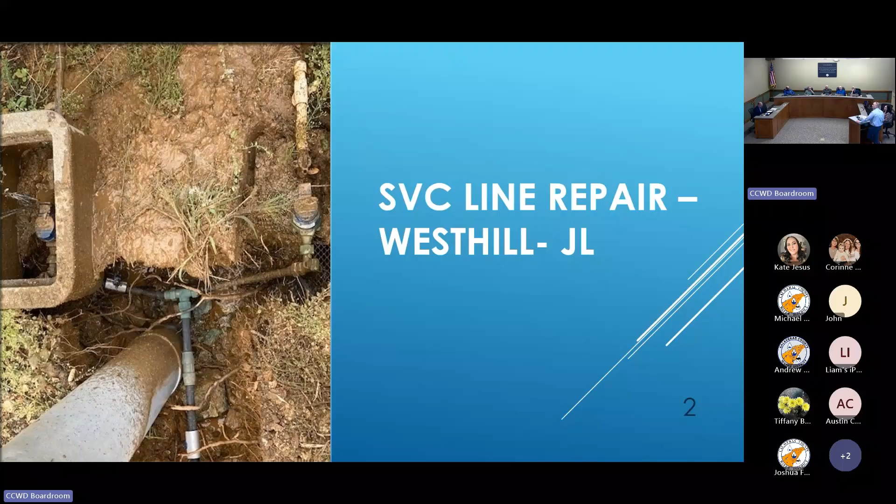So this one is called 1 for 3. You expose the service line and the manifold that feeds 2 meters, and you find 3 leaks. So there's what the manifold looks like, one service line going to 2 meters. You have a leak shown in the image on the left, you can kind of see that spray. In the image on the right at the manifold, you can see it spraying in 2 different directions. Our crews just replaced this whole thing.

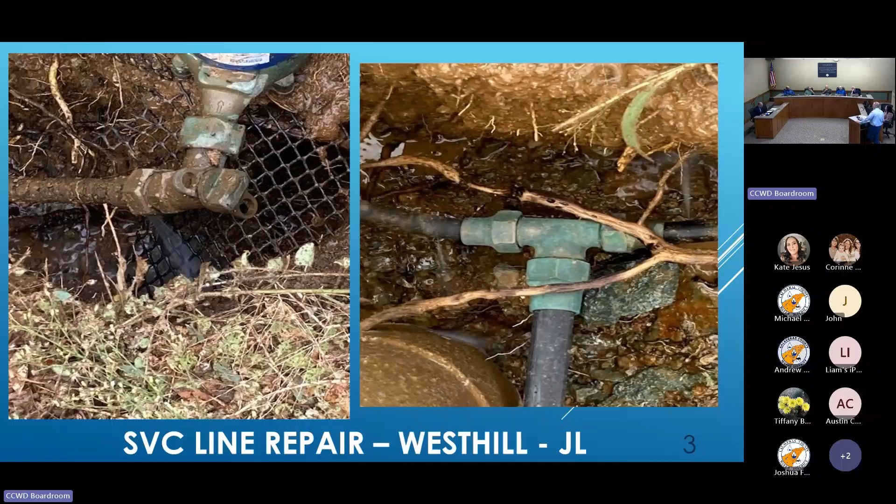One thing that's interesting about this image is the image on the left - you notice the person wearing slides is not a CCWD employee. Oftentimes when our folks are out working, they have to contend with neighbors who are critiquing their work as they go. Just highlighting that there.

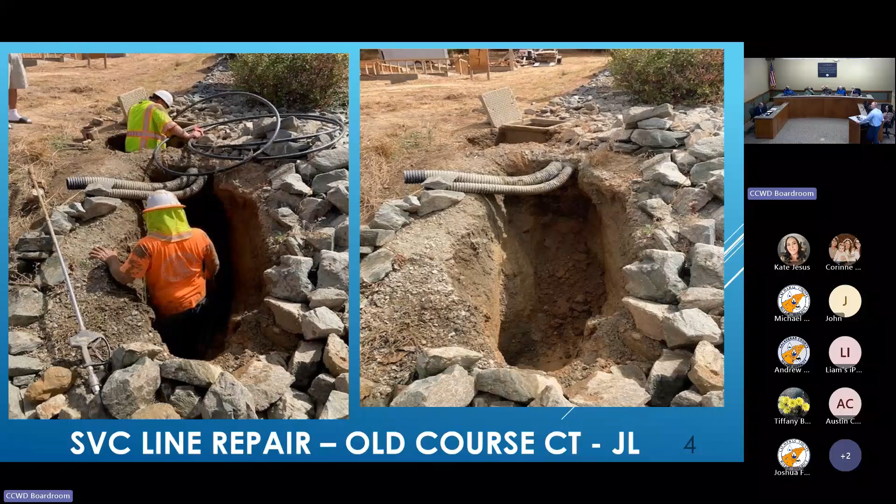This is an example of an emergency we had - a hydrant runner break in the image on the left off of Little John Road, water everywhere, crews out in the middle of the night. They were able to install the valve and a short section of new pipe to make a repair.

Then they come back the next day and pour a sanitary pad, put the G5 in, and make it look very clean. Moving forward, if somebody accidentally runs over that fire hydrant, we can shut the water off at that valve and come back at a later point in time to make a repair.

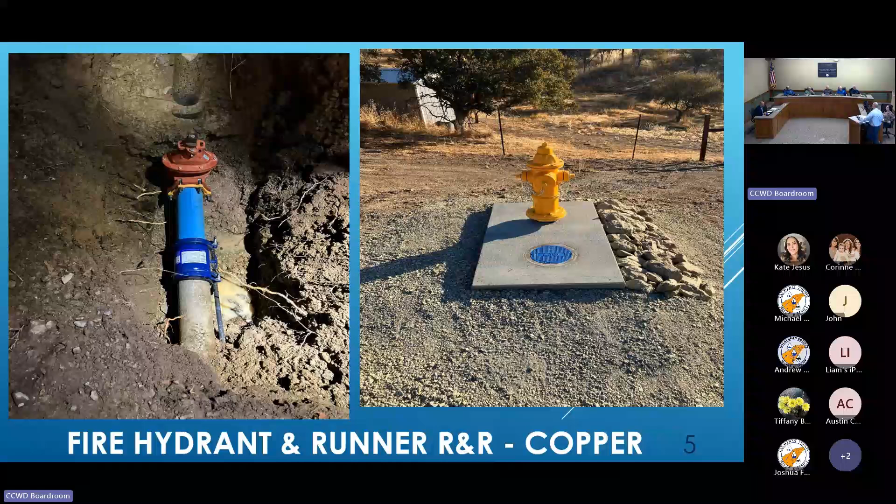So I want to highlight this one - this is cooperation between the Poker Flat Homeowners Association and CCWD. A service line that fed the Homeowners Association's park went through a neighboring property, and CCWD was able to work with the HOA to relocate the service line to make it a much shorter distance and direct feed to the park. Just want to highlight all the PG&E and telecom in that USA on the left.

All of that PG&E power sits in a common trench with the water - the same trench as the water. And our service lines are usually below PG&E's equipment, so we were there first.

But there's a lot of conversations we've had out in the field about what could go wrong. I'd always worked on the assumption you weren't supposed to put them in the same ditch, but you guys know your business. No, I mean, we're dealing with infrastructure that was installed many years ago. The district has had a lot of conversations with PG&E about improvement projects for Copper Cove and Poker Flat in an effort to eliminate this issue. This isn't the only location where we have this issue - we have it up in Big Trees Village also.

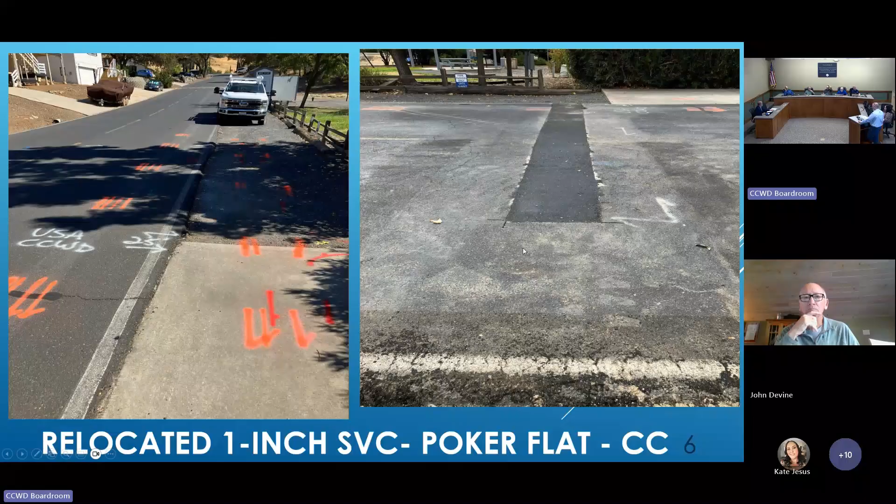And it causes, at Poker Flat, we've dedicated a lot of time and effort to replacing service lines out there, and it slows that work down. Our crews have to be really careful as they go through there. Service line repair in Venado up in the pass.

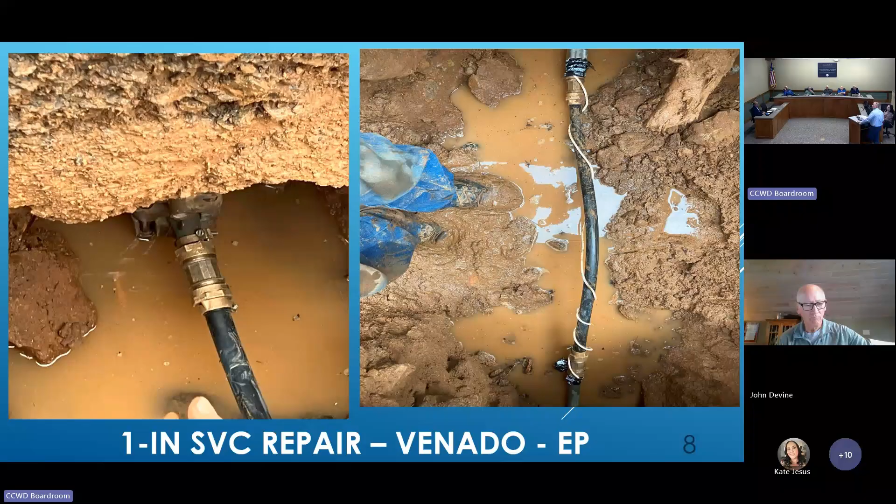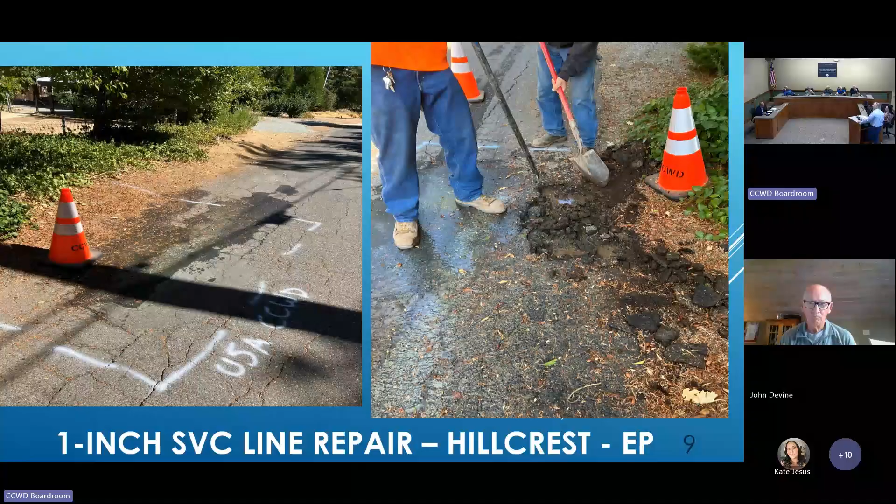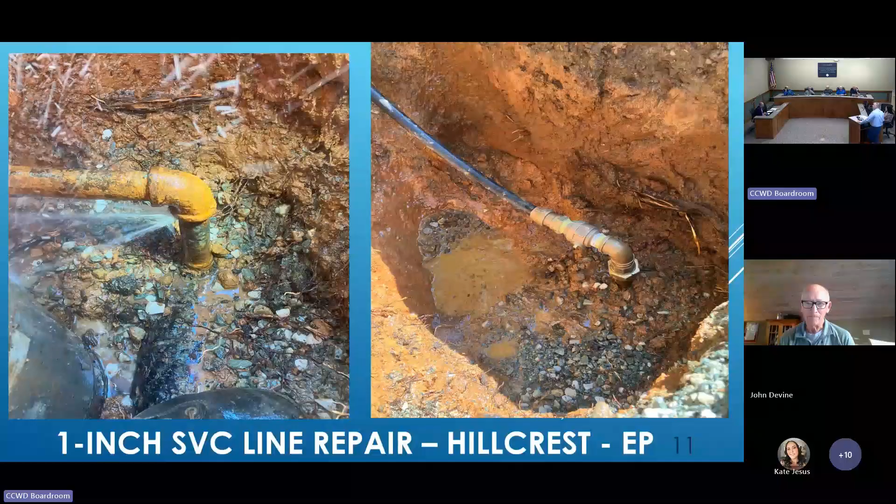This is a great one. This is a one-inch service line repair, just kind of what it looks like when we're going to issue an underground service alert. We put a cone out there, there's water on the ground, and then our crews come out with equipment. They're going to expose that line. This is an old galvanized line, as you can see in the image on the left, with water spraying out everywhere, and then the repair on the right.

You all might hear from time to time folks reach out about these temporary patches that are all over the service areas. Generally what our folks do is we're not going to call in a final pave on one patch. We're going to try to optimize the repave of as many of these repairs as we can so we can take advantage of the best possible price for the work. Usually that's in the order of 15 to 20 different repairs happening at the same time.

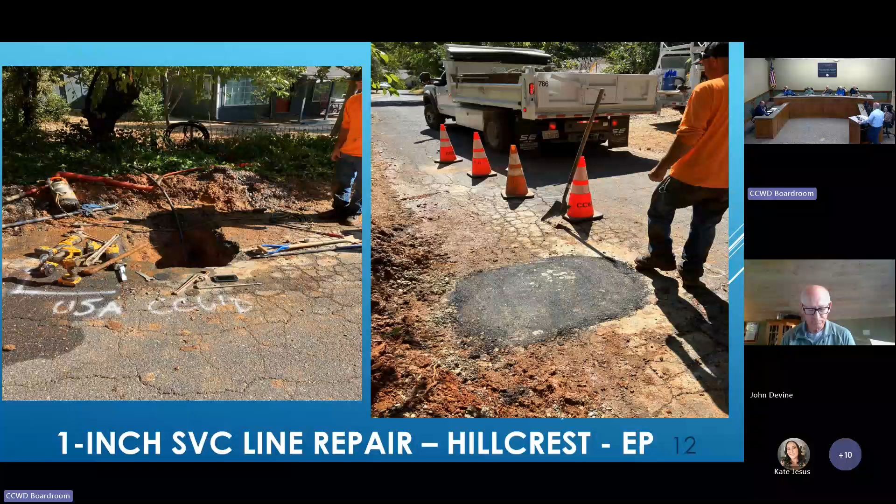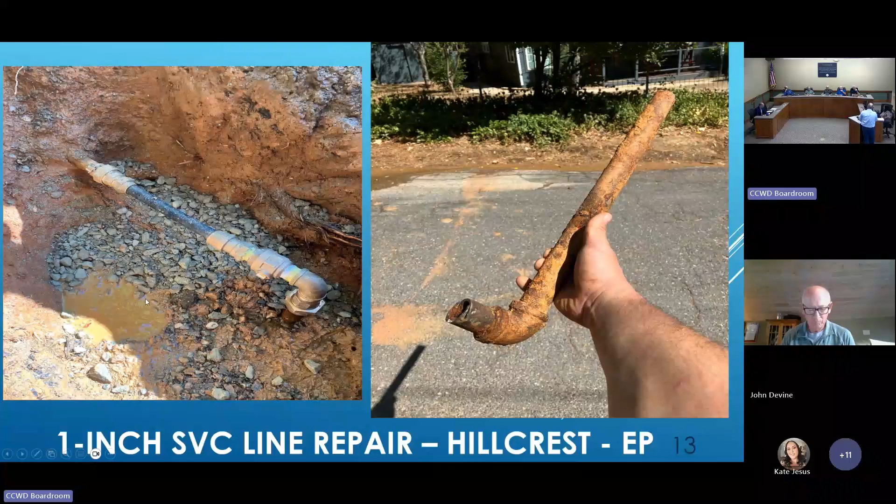How much galvanized pipe is still out there? Well, there's a section of Halfway Pines up on the pass that has a fair amount of galvanized, but I'd say that's probably the only section. Sheep Ranch, yeah, Sheep Ranch. But it's all dissolving like this slowly. Slowly, yeah, surely, absolutely.

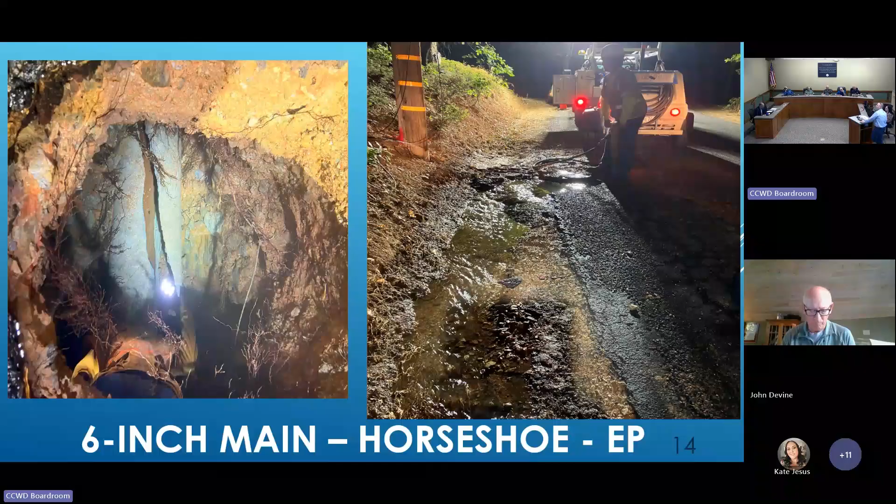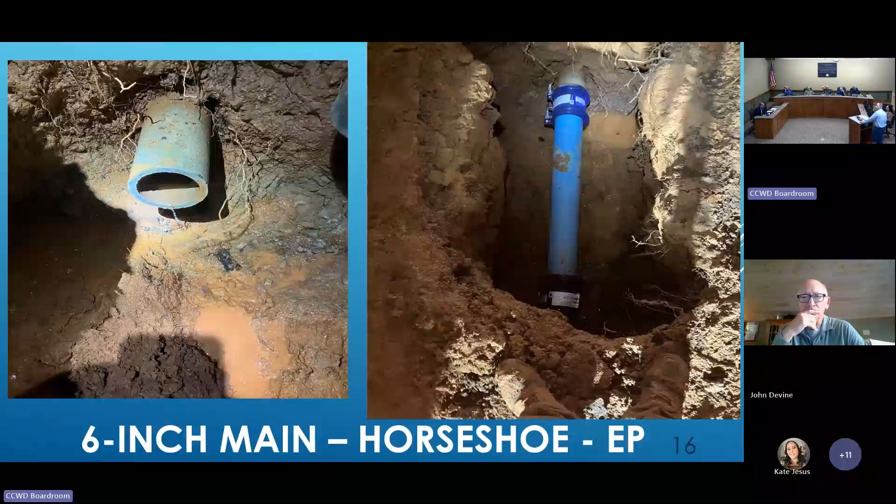This is a very interesting picture on the left. This is a line break, a main break, and you can see, it's kind of hard to see in the image, but that's clear water down to the main, and the main has a huge crack right down the middle of it. You can see the light of our employee there and his vest as he's shining the light down into the hole. And then what it looks like jackhammering out the asphalt in the image on the right to get down there and make a repair. There's a section cut out, and then getting into the hole in the image on the right to prep for the installation of a new section of water main.

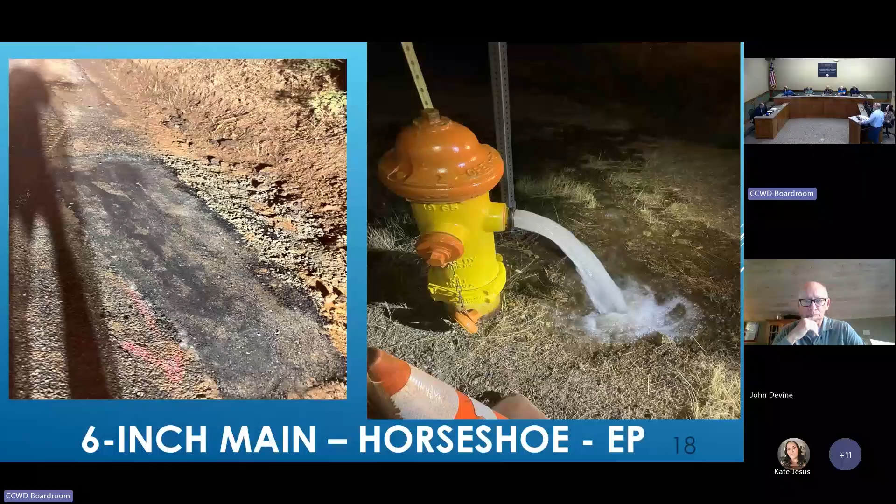How often do we get leaks in the middle of winter? It's got to be miserable to fix that. Oh yeah, I'm sure we can hear story after story from these guys about leaks in the middle of winter at 2 o'clock in the morning. Yeah, you don't tend to forget them. All the ones I've been on, I can remember.

This is folks working. Sometimes it's really hard to understand where our pipes are located. We hear back and forth, like PG&E hit this, or a contractor hit this. Sometimes that's their issue and we work to recoup money from them, sometimes it's our issue. In this case, this water main took an odd turn and we didn't realize that it did.

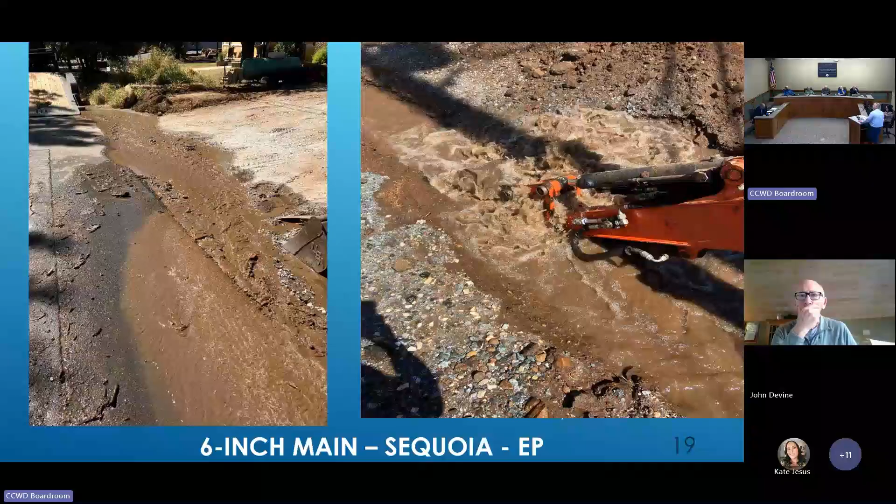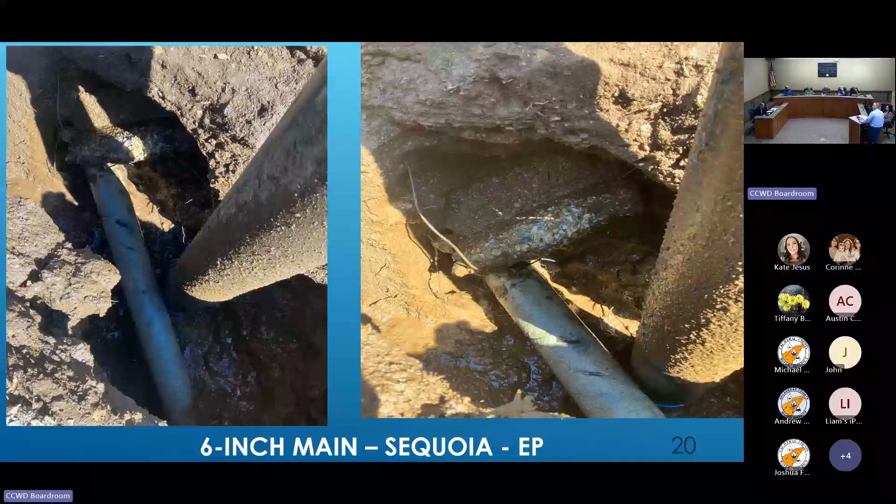So this piece of equipment, this excavator, hit the main with a tooth on top, as you can see in the image on the left and right - you can kind of see where that tooth hit the water main and sent a lot of water going everywhere. Our guys jumped in - pretty straightforward for us - cut that out and installed a new section of the main.

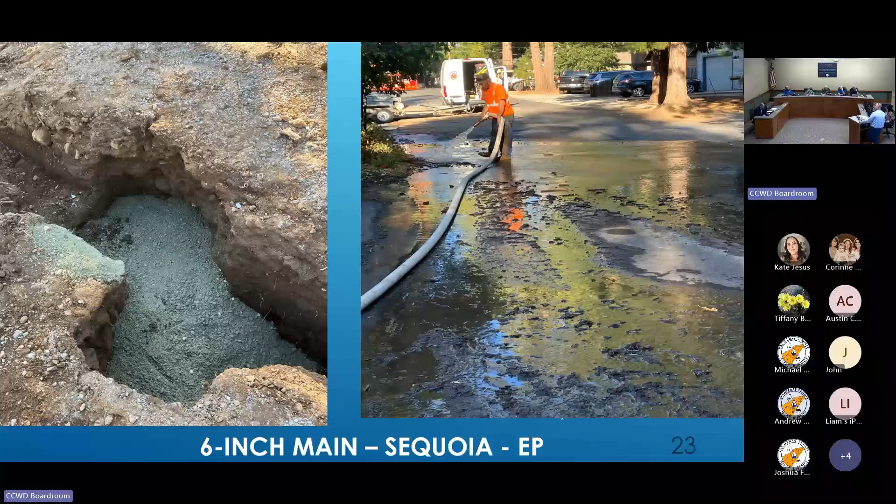And then cleanup's always important. So this is a little bit, just so you can see, the class 2 AB in the image on the left. This is the backfill material to where that temporary asphalt layer will be. And then if there's a bunch of debris all over the street, we're going to work to clean it up and make it look like that.

This is an example of prepping for night work. So we have a PRV that feeds the Big Trees Village Shopping Center. Years ago, there was an issue, a leak on a section of pipe, very small, where there's a bypass. You'll see these images that go around this large valve from a leak, and it's repaired. We had to develop a plan to go in and install a valve and install new equipment to repair it permanently.

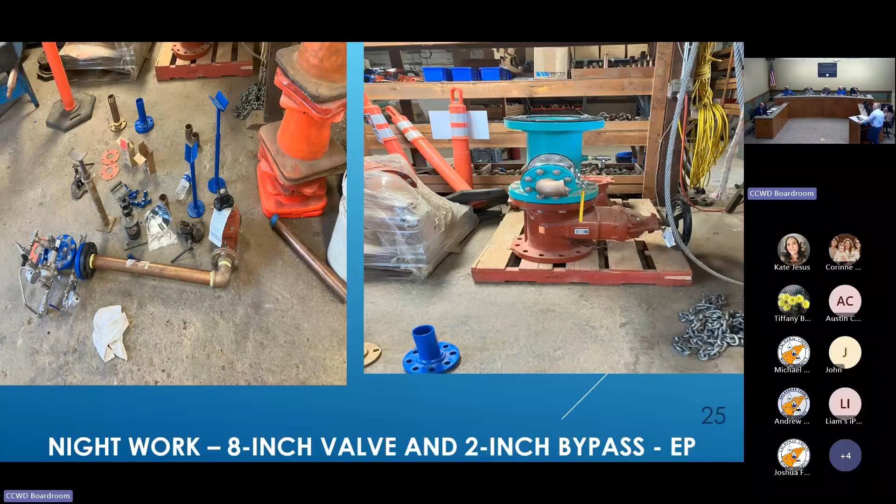So these are images of our crews taking account of what they're going to need to do the work. You get everything out in the barn, get it ready, account for it, load up your trucks. The shopping center is closed, all the businesses are closed, and we come in and jump down into that PRV vault.

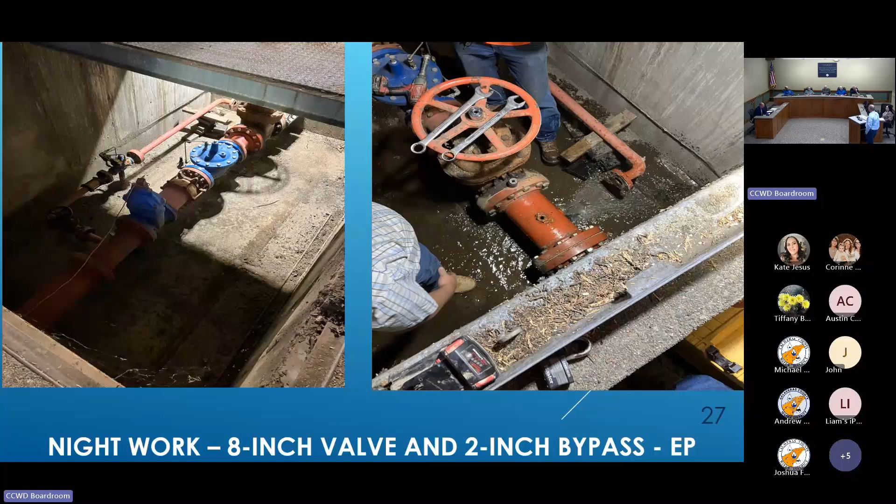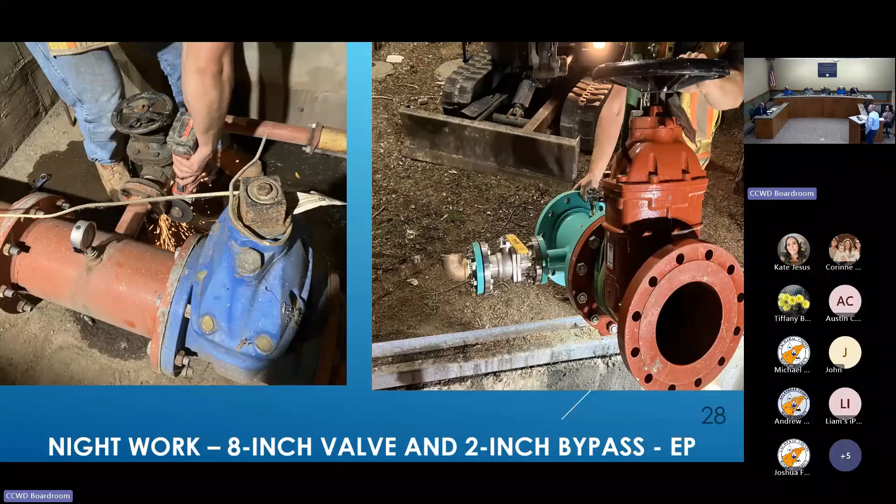So cutting the old piping out, we got the new valve in the image on the right, with the 2-inch bypass valve and piping.

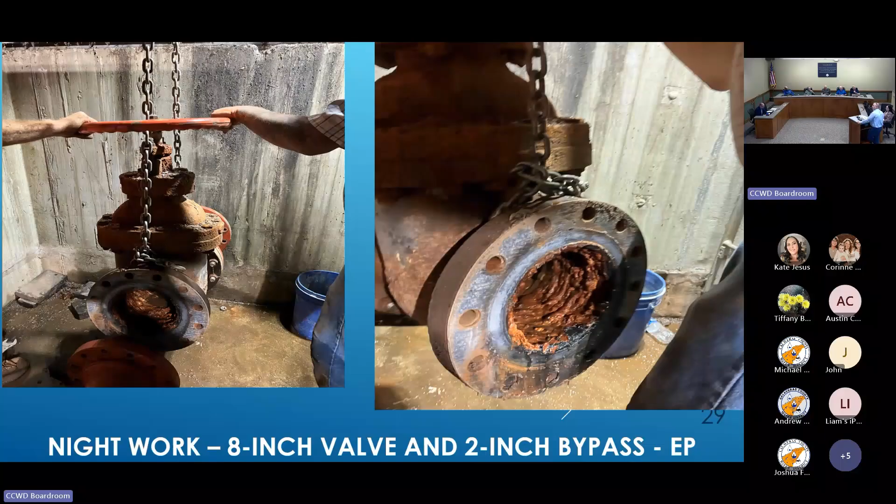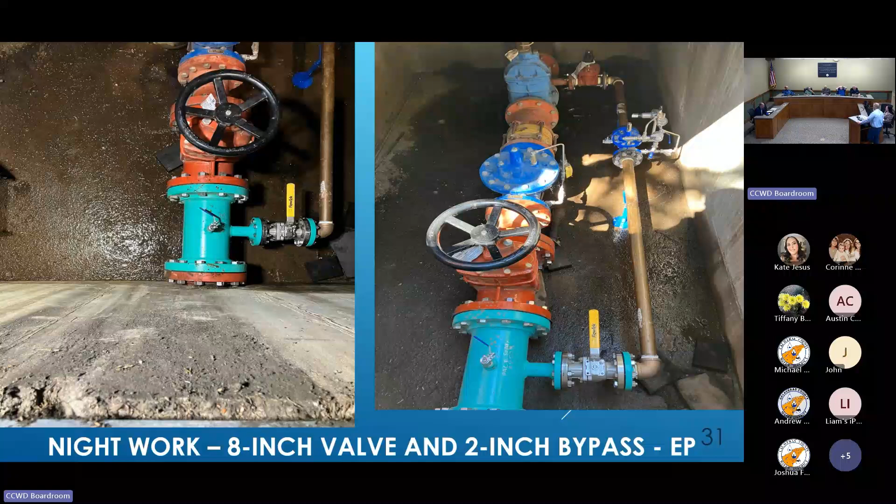And then here's the old section pulled out, in the image on the left, and then the new equipment and new valve installed with the new pup in the image on the right and left. So this was all done after some time - the construction crew gets together in the middle of the night and does the work.

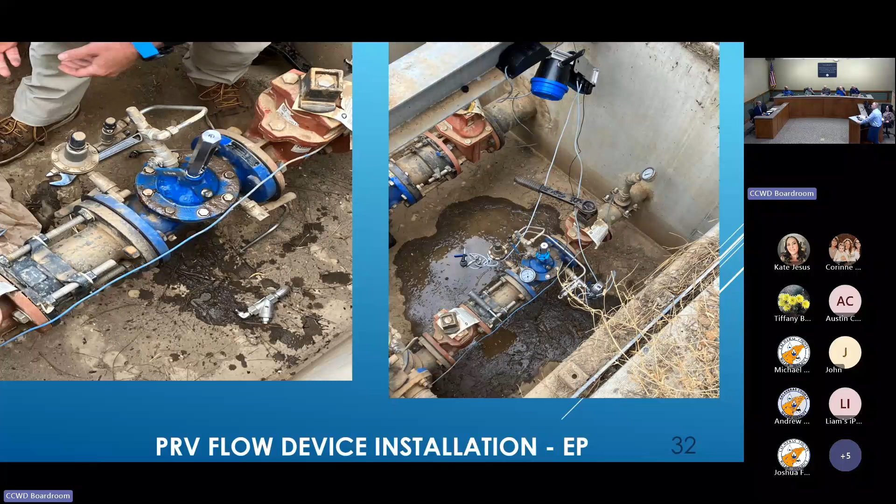We're installing some pilot controls on a Cla-Val valve, a pressure control valve, essentially is what that is, so we can convert that to flow. Then you can see inlet and outlet pressure and water flow on your phone. And we can then incorporate that information into our work order, basically our GIS-based work order system.

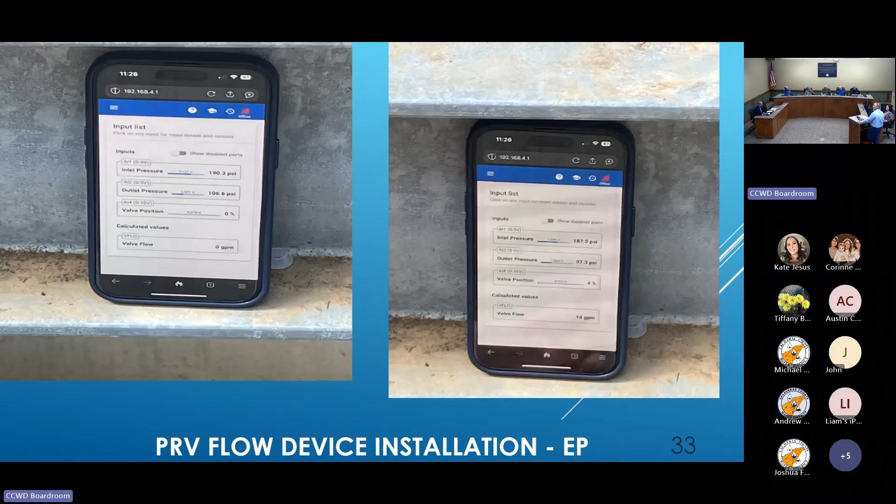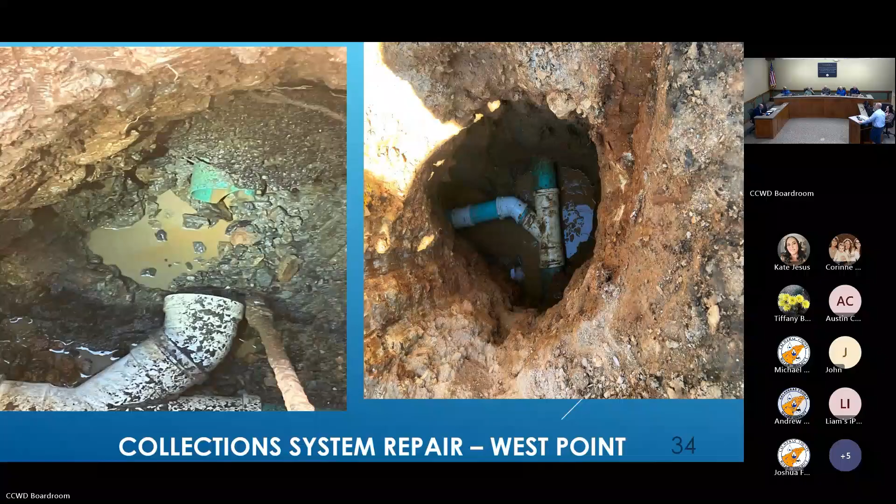It seemed to be watertight, but when our guys found it, they destroyed it and re-plumbed it to make it actually operational and effective. So sometimes you run into weird things when you're out in the field.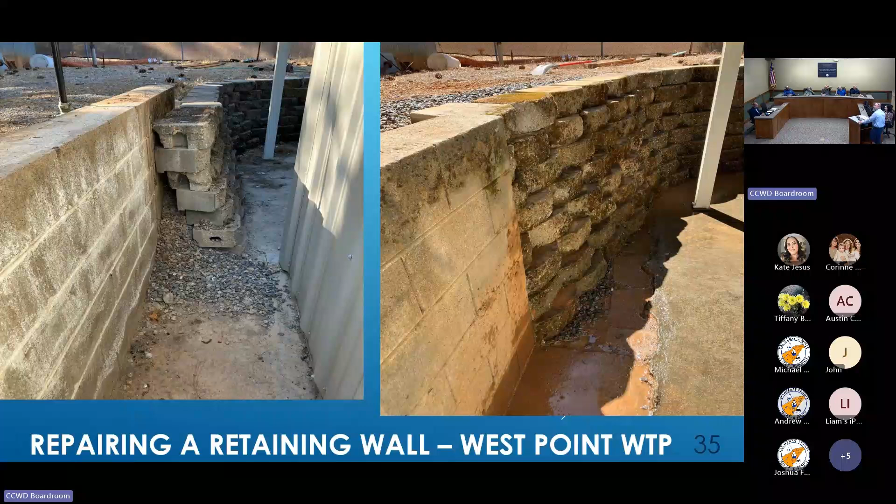And we ask, as you guys know, we ask our crews to do any number of things - repair a retaining wall, so obviously take it down, build it back level, clean it up. Flush. Grading work. So this is up in West Point. This work continues.

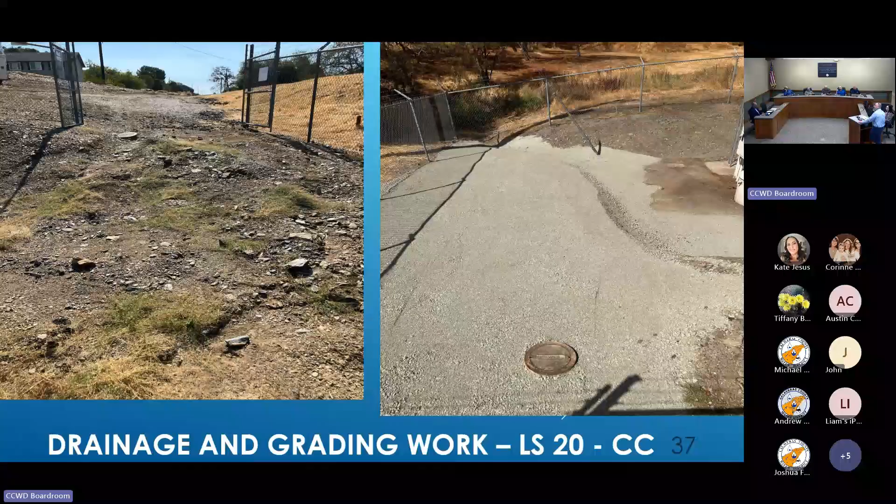Drainage work. So obviously you can see the drive into Lift Station 20 in Copper Cove. I think this is near Moccasin there, Director Thomas off Little John. It's kind of hard to get in and out of there, so the construction crew went in, cleaned that up, and put some rock down to make it look really nice.

Cleaning out the sludge lagoon at La Contenta. We had a small forest of plants that were living on top of that sludge, so we were able to get a larger excavator in here and make quick work of all of that.

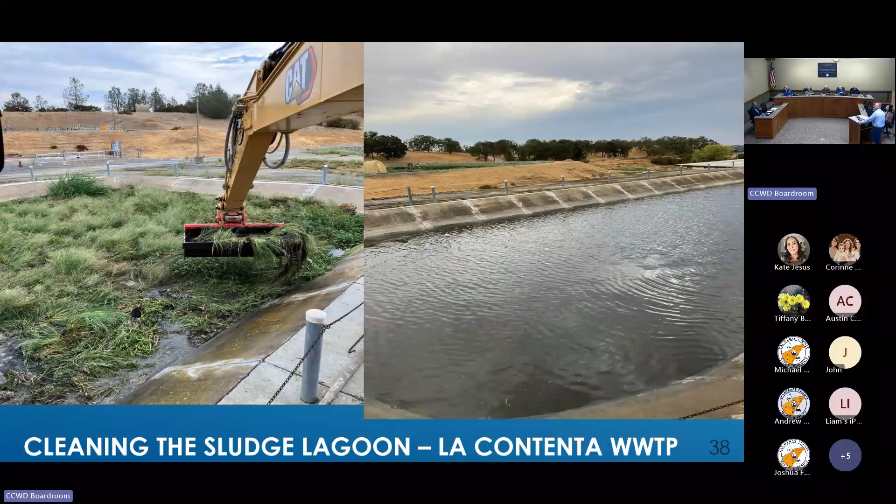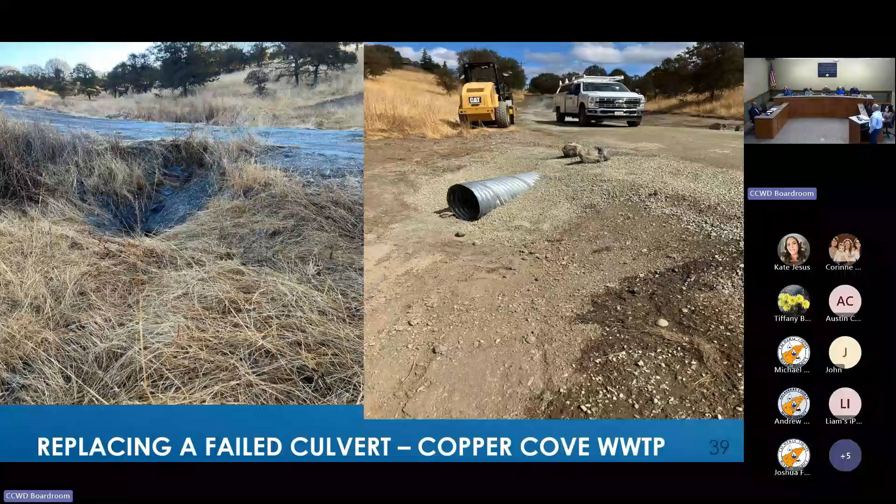Replacing failed culverts. This is on the haul road that goes into our Copper Cove wastewater facility. The culvert pipe had become smashed, so our construction crew went out and replaced that and reestablished the road.

If you did not know, we had a couple of days this last month where we were operating off the old Hunter's pump station at the Hunter's Water Treatment Facility, so not pulling water off of the tunnel tap at McKay's, but pulling water out of Hunter's Reservoir. Before we do that work, our mechanics and electricians always go in and verify the operation of the pumps. You see two mechanics in the image on the left, checking the oil, making sure those pumps are going to work, and the electricians jumping into the MCC in the image on the right.

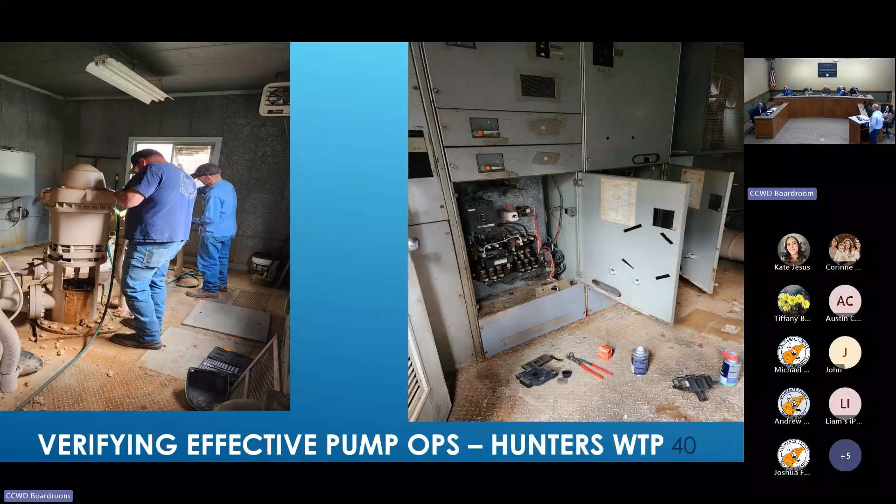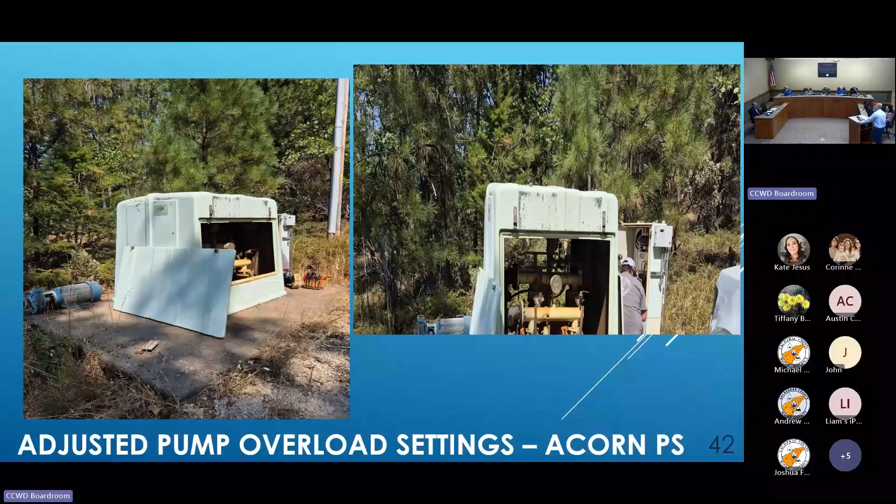Electricians, again, overload settings on a raw water pump station can wreak havoc on your ability to convey water where you need it to. So we call out our electricians, they understand that settings are inaccurately set on these pumps, and we're able to go in and change the settings and ensure normal operations.

Some of the work that our electricians and instrumentation techs do really just kind of is otherworldly, in my opinion. So here's a PLC at the Copper Cove wastewater treatment plant headworks. It's going to take all that sewage, grind it up, separate the trash, and push the sewage into the process. And if that fails, we need to understand why, so they're able to plug into the brain of the system and understand what's wrong and what might be happening, and then correct it.

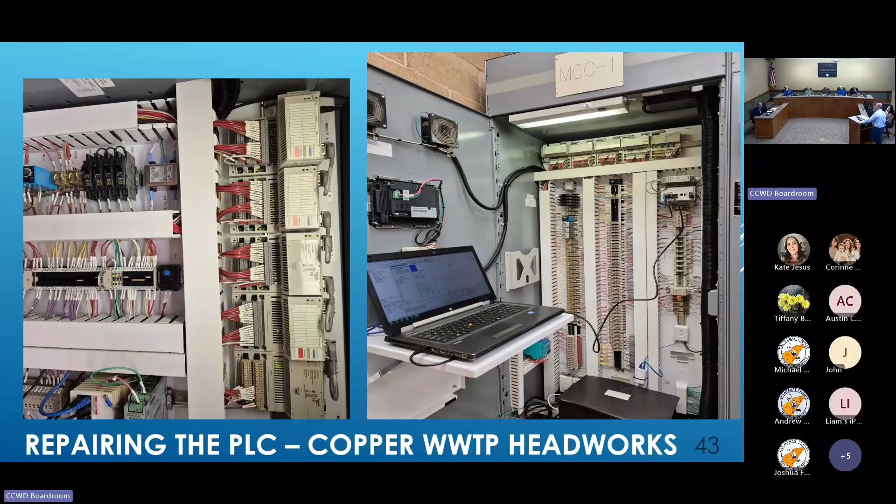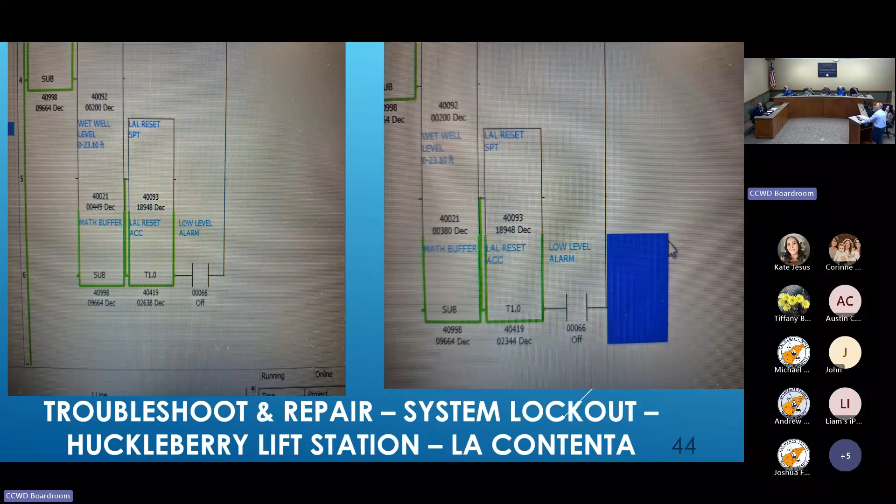Similar case here at the Huckleberry lift station. So this is kind of what it looks like, the ladder logic of information and how things are supposed to operate - kind of, if not this, then that; if at this setting, do this. They can follow that flow path and identify what the issue is and correct it.

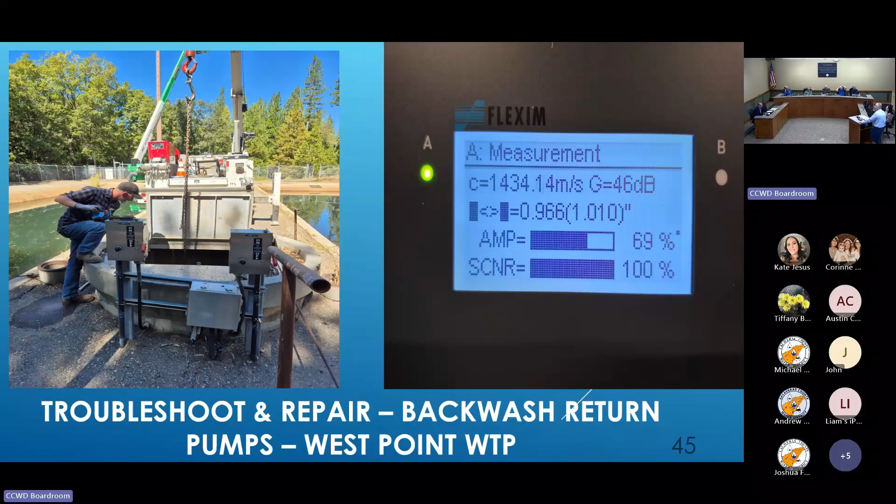Mechanics and electricians working together up in West Point on the backwash return pump system. Troubleshooting the system electrically, turns out it was a mechanical issue - a stuck check valve - so then the mechanics are able to say, hey, we'll take it from here. You can see mechanic Roy in the image on the left pulling the pump with his crane truck.

Every once in a while you have a localized power fail, you call PG&E and they're like, no, the power's fine, we don't know what's going on - you guys have an issue on your end. So our folks have to kind of walk the line on our property. In this case, they found a great blue heron had caused a power fail in West Point, so then you got to call PG&E out so they can take care of this and set you back on your way.

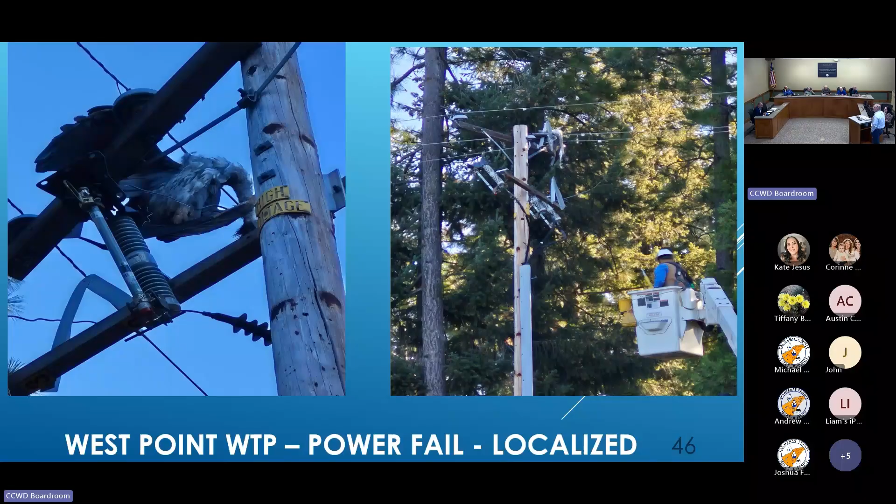This happened to be actually after the Air Resources Board had heard the proposed amendments for the regulation and adopted those regulations, which include no ACF requirements for small fleets in low population counties like us until 2030. Good job - I'd like to tip the cap, as the tour that we had with the Air Board really had an impact on their staff. They acknowledged that tour really affected their decision making when it came to low population county fleets, especially the drive from White Pines to the Girl Scout camp on the 5 miles of dirt road with the water main under us.